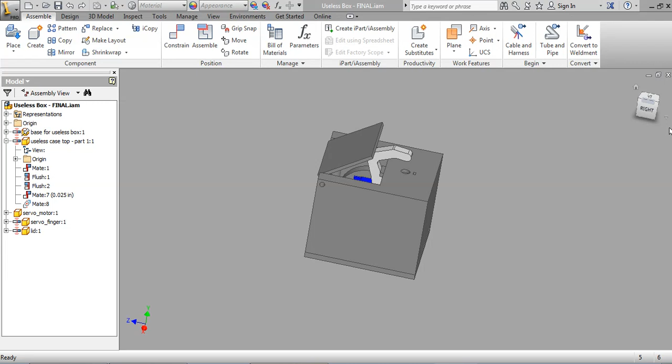So to start with, I'm just going to go to the top, and you can see right away that this hole does not line up with the finger, so we probably need to move the hole. Now the other thing too, if I kind of rotate back this way—whoops, wrong way—let's go back this way and back again.

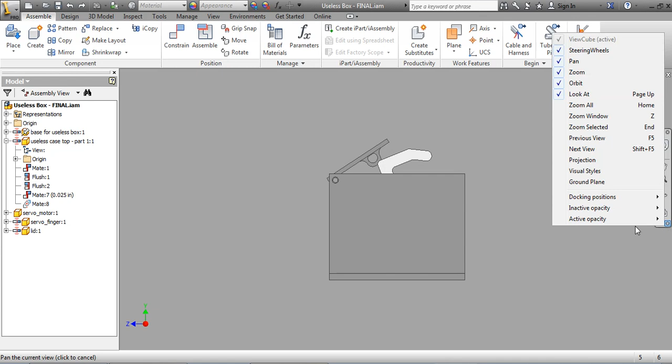I'm going to come over here to Visual Style, and I just want to check that something's lined up here. So if you don't have this Visual Style shaded with edges, what you got to do is arrow down. See how I've got it checked? I'm going to uncheck it, come back here, go Visual Style, check it again. And I'm going to go to Wireframe.

Now what I'm doing in here is, here's the servo, here's the finger, and you can see that this finger is hitting that little lump there. So if I take this right now, I can move this back and forth, okay? Now I don't want it to go past that lump, and you can see I can't actually go any further because it actually stops it, okay?

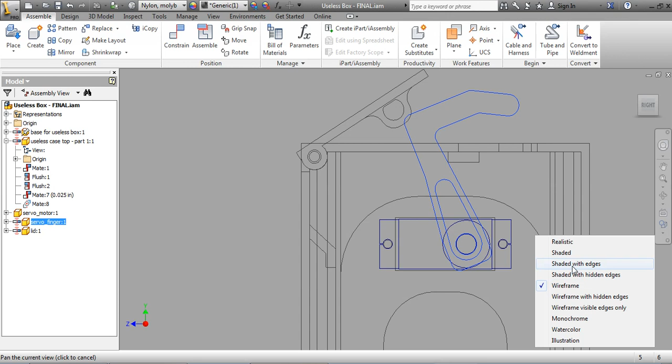This is very important because here's the hole for the switch, and if I go back now to my shaded with edges, and I'm just going to tilt this a tiny bit—this is the hole here that the switch goes into. Basically the problem is that it's a toggle switch, and that toggle switch has to bend forward. It's probably going to bend forward to about here. This finger might not actually make it, okay, to actually push the switch over. So we're going to have a little bit of modification.

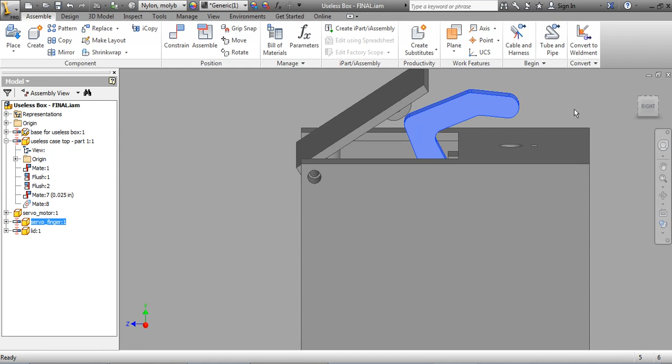So what we're going to do is—and again, you can see that's not lined up—we're going to double click this. And when you double click the top, you can see that everything else is highlighted out. Okay, and now only the stuff is highlighted for the actual top.

So I'm going to go through these and I'm going to find—there they are, the switch holes. And I'm going to expand this, go to the sketch, double click it. Now I can go and modify.

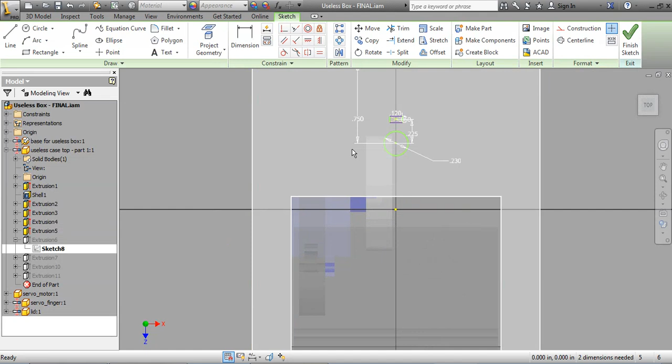So a couple things. One, I'm going to move this hole down a tiny bit, so go right here, 0.75, to go 0.85, so 0.1 of an inch lower.

Okay, and the other thing I'm going to do is take a dimension from this center over to here. Okay, you can see where it is. I'm going to say 1.2. How's that do? Oh, that looks pretty good.

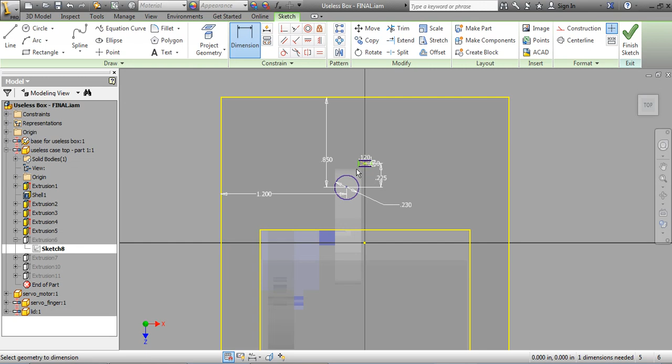Oh, this one doesn't move here, so dimension this one as well. I'm going to put this one to 0.12, and there we go. Everything's lined up again, right?

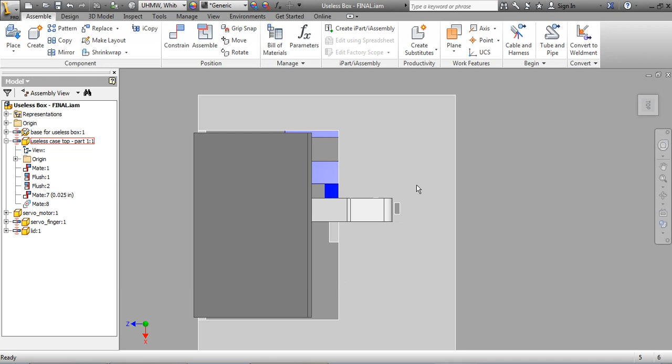Click on Finish. You can see everything kind of is still highlighted over here, so what you got to do is up here, click Return, and now we're there. So now if I look from the top view, you can see that the hole's been moved over and the hole's been moved in, and that's probably a better position for that switch. Okay, so that finishes that up and touches that.

Now the last thing is, these are kind of lame colors. Let's add some color to this. So to add color, all we do is we can just basically hit up here.

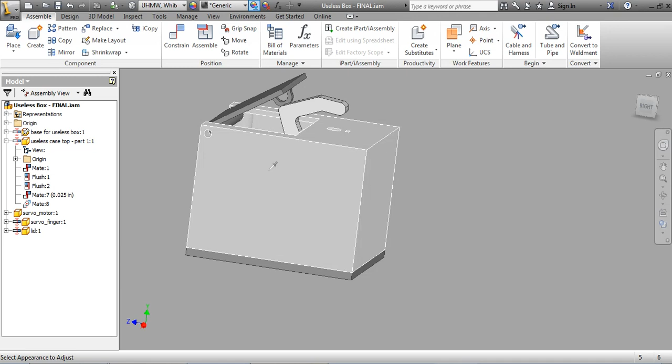These are some different—this is basically our adjusting our colors. So if I was to click on this, okay, and now what I do is I can move this stuff around and I can get some different colors in here. Now that's kind of cool.

Now what I could also do is, instead of this generic, I can go and pick different patterns too. Okay, so I can come down here, let's just pick, I don't know, let's just pick yellow pine for something to do. Right, so there's my yellow pine, but then I could also adjust it to my color.

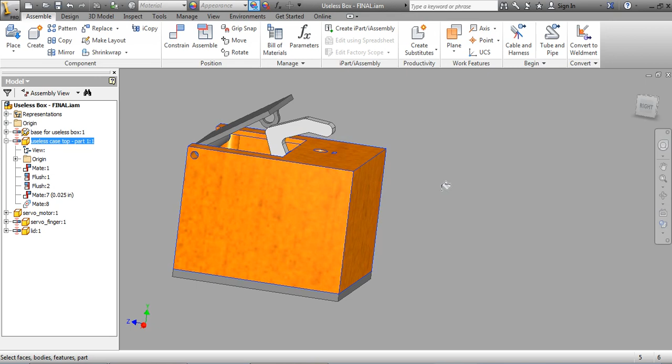Okay, now there's multiple pieces that I want to have that color, so all I do is I click on this one to fill it. Whoops, hold the shift key down, click on that one, and then I want that a different color.

So I'm just going to hit apply, and then what I'm going to do is go back to this adjusting colors, and I'm going to pick the bottom one, and I want that one just to be maybe black or something. So there we go. We'll just pick up something like that, and then OK.

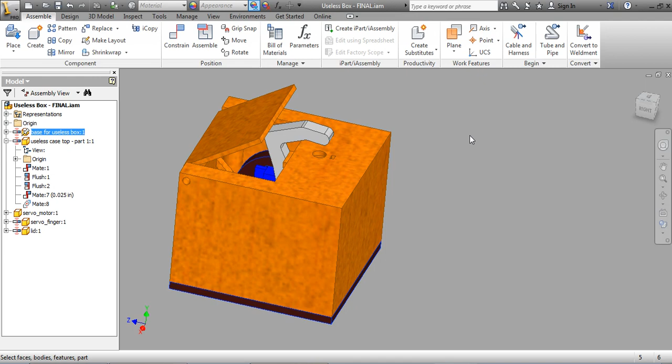So there then is my rather ugly useless box, and we are pretty much done, and you're ready to start 3D printing this whole thing and getting it going. So that completes this tutorial.